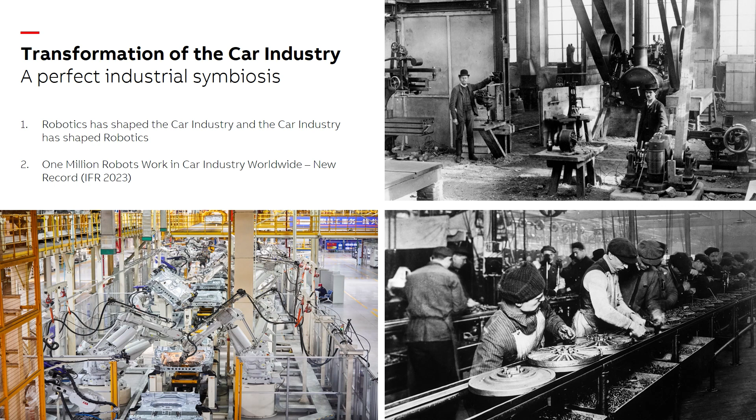Let's go a little deeper on the car, on the left side of the picture. Robotics and the car industry have been evolving together in a perfect symbiosis. For many years, robotics has been enabling mass production of cars, and also the development of this industry has pushed robotics to the level where we are today. One without the other would not have worked alone.

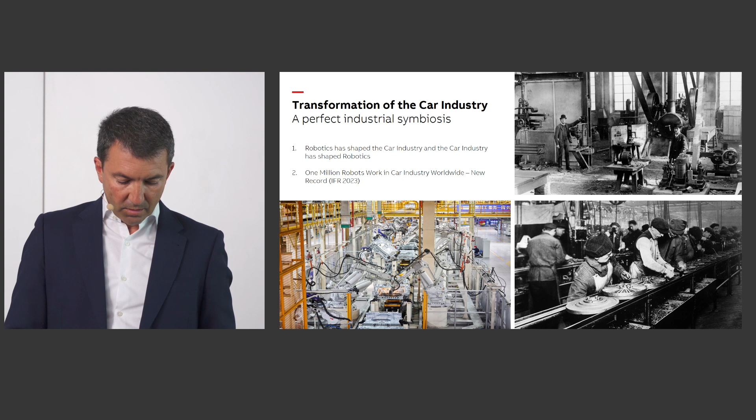But now we see even more demand. We see a shift in generation, looking more for sustainability and personalization, and this is why the technology is evolving to support higher simplicity and flexibility, making things easier for the car industry. Today we also see the mega trends: shortage of labor, shortage of skills, aging population—this is requiring even more automation in industries like automotive, for instance.

But there are also some applications in the auto industry, like welding and painting, that are already fully automated today. For example, the American Welding Society has long predicted a shortage of welders in the US of around 400,000 welders in the next 2-3 years. That's really massive. And the International Federation of Robotics has just announced that there have already been 1 million robots deployed in the auto industry.

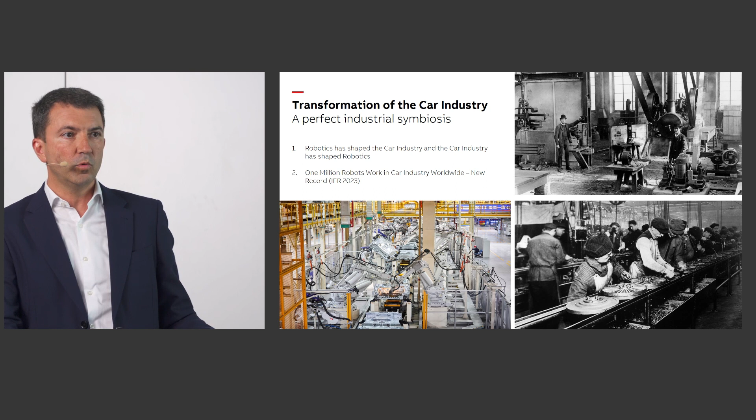That's really a milestone. The focus now is more on delivering higher flexibility, implementing more intelligent solutions to support the industry, which is facing different challenges, like moving from combustion to electrical vehicles, for instance. But if we move then to the right, to the parcel, it can be said that many of those challenges are also present in logistics. Today, we see also a shortage of labor.

We see that the consumer is the king. I want to buy this, and I want my name on it, and I don't want this in 5 days. I want it tomorrow or even today.

And this is putting a lot of pressure in the industry, in logistics. We see some leaked Amazon research warning the company that they will face problems finding workers for their warehouses in the US in 2-3 years' time. Or we see many other firms announcing that logistics will follow a similar path as automotive did 40-50 years ago.

With much higher automation, Amazon also says that a robot can pick 1,000 items per hour, which is much faster than what a worker can do, right? And we see also some companies like DHL Supply Chain that have already deployed 700 assisted item picking robots in their warehouses in US, Europe, and UK.

So that's massive. But the next obvious question is, what is the potential to automate this, right? To extend the automotive comparison, we can see that logistics is at the level automotive was 40 years ago. There is some implementation of automation, but we are still at the starting point.

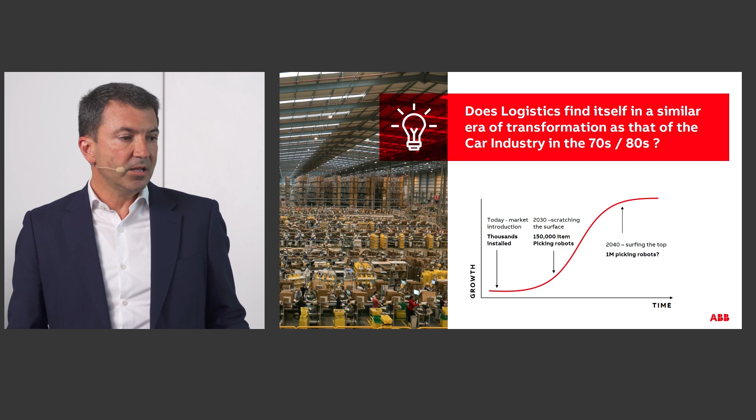According to Interact Analysis, they are estimating 150,000 item picking robots in 2030. So, when will we reach 1 million? Probably 2040? That's a good question. But this is still obviously a strong potential to grow along this curve.

That brings us to the third question. So why does this not happen still, right? Why are there 1 million robots in the car industry, but so few in logistics automation? And this is a vital question today, and is bringing on the shift on the technology, on the power of AI and machine learning that will shape a new era for logistics.

The automation in the warehouses is facing different challenges. Let's take an example of this worker who is able to identify which is the object that needs to be picked. She's able to identify how to pick it, and has the dexterity to take it from the shelf and put it in a bin, right?

Even in a structured way, she does not know what is the next item to be picked. But this is very simple for a human. It's even repetitive, sometimes even subconscious. But this brings a lot of challenge for the robot.

How to be able to pick things that we don't know, that are not informed beforehand, and how to have the dexterity and ability to handle this situation. This brings a very complex equation. And that's why AI is the solution for that.

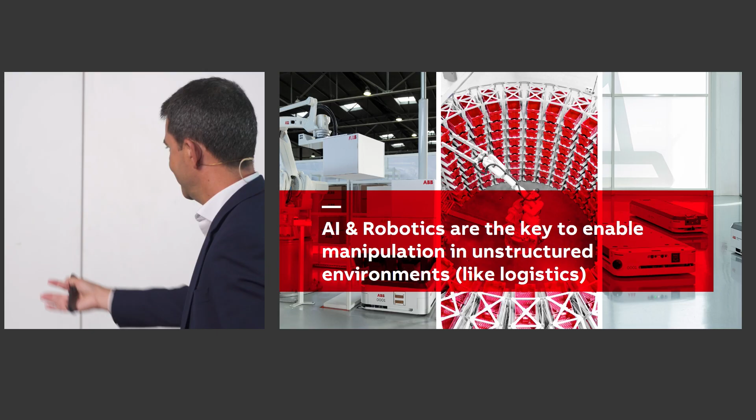I would like to introduce Jordi, who can explain to us what are the developments for the AI in our item picker. Thank you, Danny. Indeed, a very complex equation, straightforward for us humans, but really, really complex for a robot.

But it's even more than that. So going back to the analogy with the car industry, how many parts does a car have? Somewhere between 20 and 30,000 parts. However, those parts are perfectly known, and we know perfectly how those parts need to be combined in order to create a car, to assemble a car. And once this is done, basically you copy and paste, right?

In logistics, this is rather different. We have millions of items. And those items are never known in advance. And besides, they can change on a weekly basis, on a monthly basis. So that, of course, drastically changes what we have done in the past for automotive.

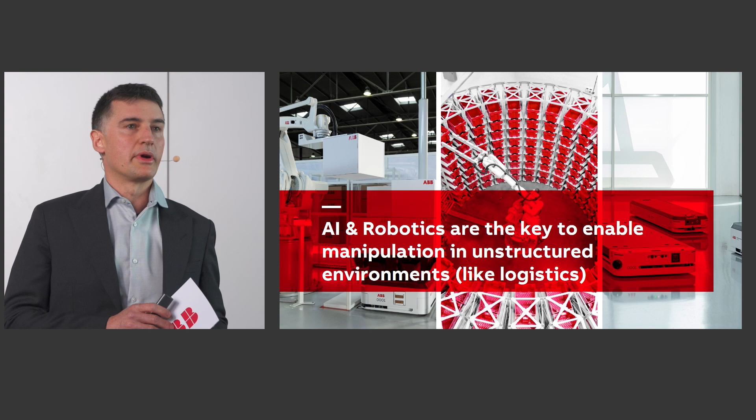And the answer is AI, of course, right? So let me give you a very simple example. This is a phone, and I think we all agree that this is a phone, right? However, a phone can have different models, right? Different number of cameras, different sizes, shapes, and so on.

But we all agree that this is a phone because we all have a model of what a telephone is, right? If we start deforming this item, at some point, some of us will start saying, hey, this is not a phone anymore. Some of us will say, okay, yeah, I think this is still a phone, right? That means we have some sort of threshold up to which we agree that this is a phone, and from which some of us will say this is not a phone anymore. AI is basically reproducing this mechanism, right? To create models of reality.

I remember very well, my daughter, who is now 6. When she was just a few weeks or months old, she would grasp an object, a toy, and spend minutes, half an hour, looking at that object. It's a beautiful scene. We've all seen that.

She was creating a model of that particular item, just as we're creating models in logistics. That's exactly what AI and logistics is about. In this example, we're training a model for an item category, which we call a cup of coffee.

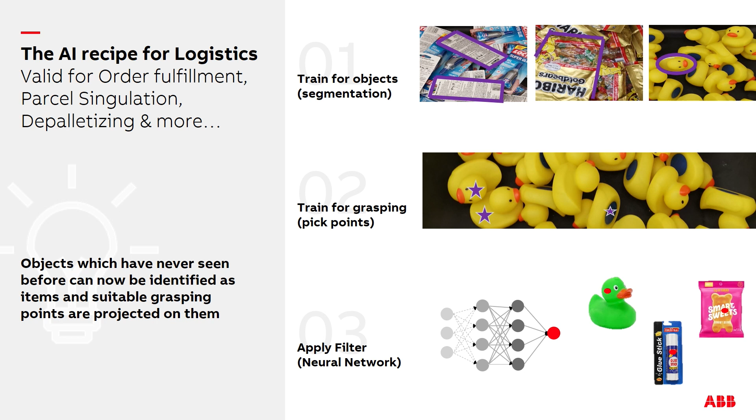The filter basically transforms an image, a picture that has been taken of the bin, the tote, or the pallet, and it outputs optimal grasping points. That's the whole idea about it.

And now, handing back to Daniel to share some really exciting news.

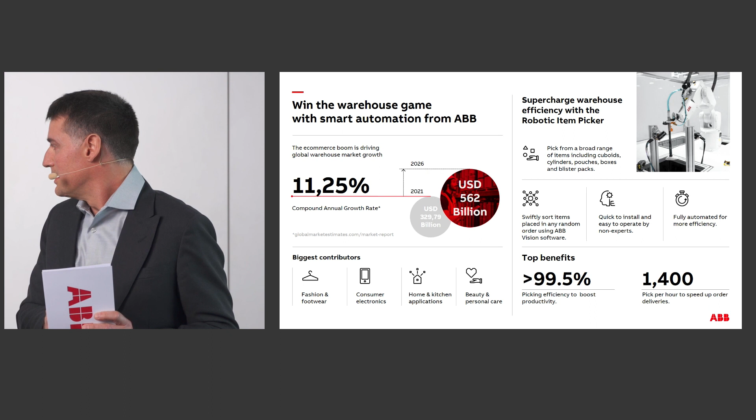Thank you, Jordi, for the explanation. Really like the example of your daughter - it really makes me think about how we are all learning continuously. So, the global market, as we discussed about the automotive industry, right?

The global warehouse market is growing at a pace of more than 11% compound annual growth rate, based on global market estimates. And as we mentioned, it's not only growing, but also increasing in complexity, with higher personalization and customization, as consumers want things now and not in 5 days' time.

So all this is changing, and we're happy to announce that we launched yesterday our AI-enabled robotics item picker, which makes fulfillment faster and much more efficient.

The robot has the ability, thanks to AI, to learn, identify the object, know where to grasp it, and the dexterity to move it and decide where to place it. This with very high speed, up to 1,400 picks per hour, with great efficiency, more than 99.5%. This is a great milestone that we achieved here today.

The technology does not require any human intervention, or even require the robot to know what is coming next or what the attributes of the objects are that it needs to pick. The AI enables this technology to identify the object, identify the grasping point, and take it from there. Let me show you the video, where I hope you can see and understand this better. This is the video for the robotics item picker.

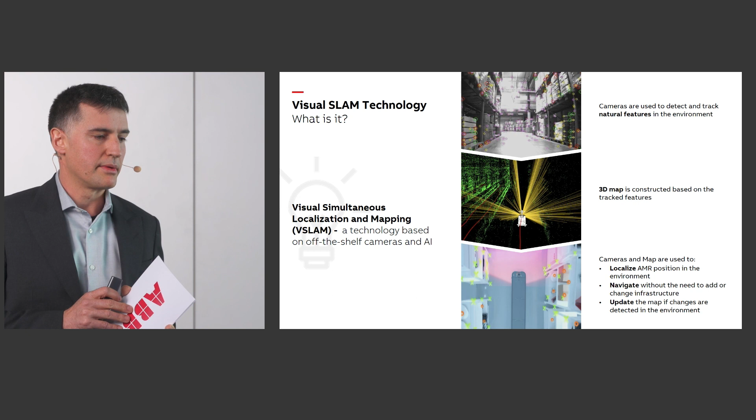So this is a very powerful technology. We've been testing it the whole last year, proving that it completely outperforms the state of the art of SLAM, which is 2D SLAM based on LiDARs, and we're ready to introduce it in our new portfolio of AMRs.

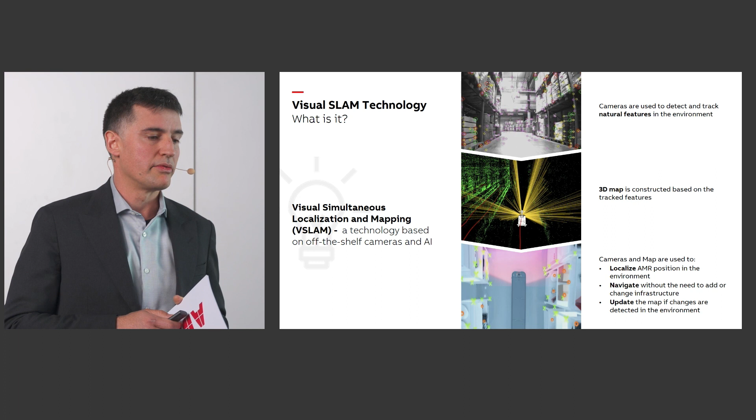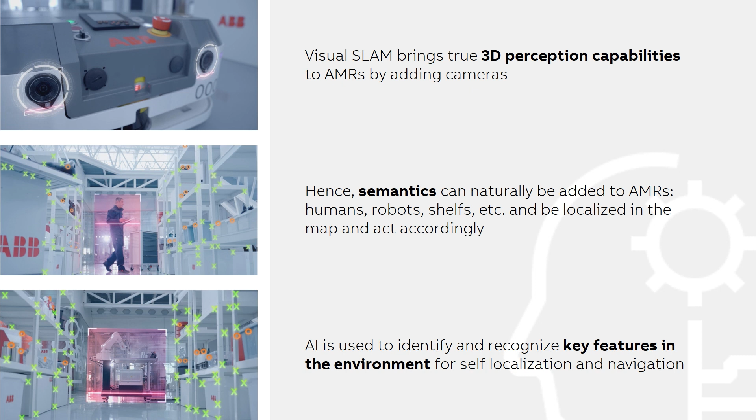Besides that, Visual SLAM offers a new dimension of possibilities because it's about 3D, and 3D is obviously more than 2D. If we take a forklift, for instance, it always requires a laser scanner on top, plus some reflectors, some markers, some artificial landmarks in order to properly do this triangulation. With Visual SLAM, we can apply this technology for forklifts, but we can also apply it identically for goods-to-persons AMRs, because we're looking on the floor, to the front, to the back, to the ceiling, because it's 3D.

Plus the fact that it's based on cameras, off-the-shelf cameras. You can really use cheap cameras if you want for Visual SLAM. So there are some real hardware cost benefits in Visual SLAM as well.

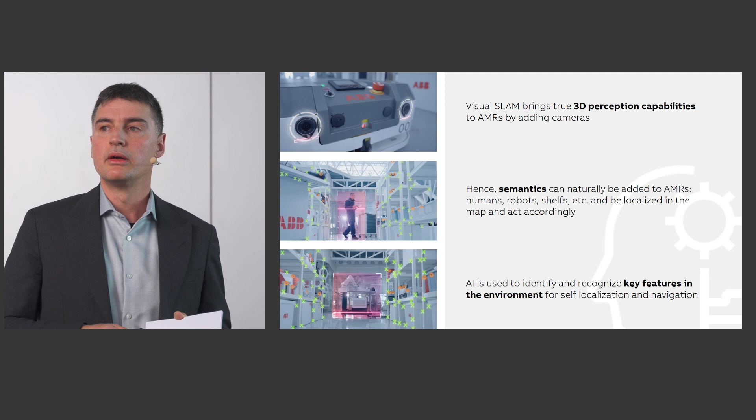But besides that, since we're bringing similar perception capabilities as those of humans onto the AMR, it means we can do many other things, like semantics. A human is not just an obstacle, a human is a human, and we can identify that it's a human because we are applying AI. We identify that it's a human and localize the human in the environment. You can apply that to pallets, to shelves, to whatever. With that, you can bring a much higher level of intelligence onto the AMR with respect to the classical 2D SLAM solution based on LiDARs.

Which are the key benefits of Visual SLAM?

First of all, it's more robust and flexible, and we're pretty certain when we say that, because we did very intensive endurance testing with our R&D team in Spain. We did all kinds of perturbation on the sensors. We applied smoke, we did occlusion on the sensors, and the system was still able to localize. As long as there is one single camera that can find one feature, it's enough.

It's easy to integrate and commission. Basically, we don't need any additional infrastructure like you would need in many other cases where you're using 2D SLAM. And it does the job. It really does the job. It's robust, it's accurate, it's actually more accurate than many 2D SLAM commercial solutions in the market. So we're convinced that this is the way to go.

We are really breaking the ice here, introducing a very new technology, very powerful, and this is the beginning of a new journey in mobile robots. Let me show you how this looks in reality.

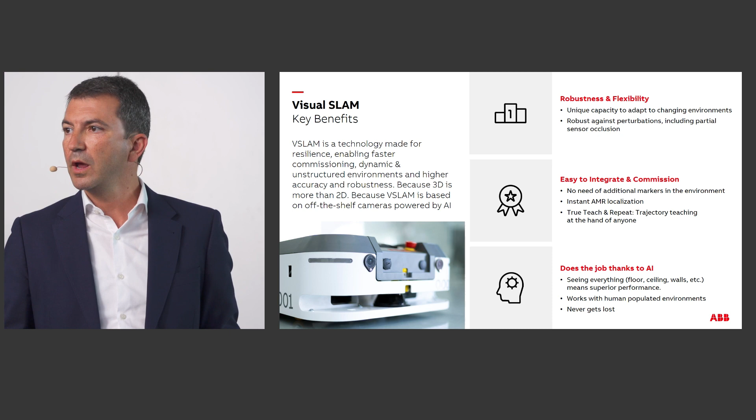Let me show you one last example: an automated flexible cross-docking solution that we put together in this animation. Roughly speaking, cross-docking means resorting of goods that are received from one carrier to another.

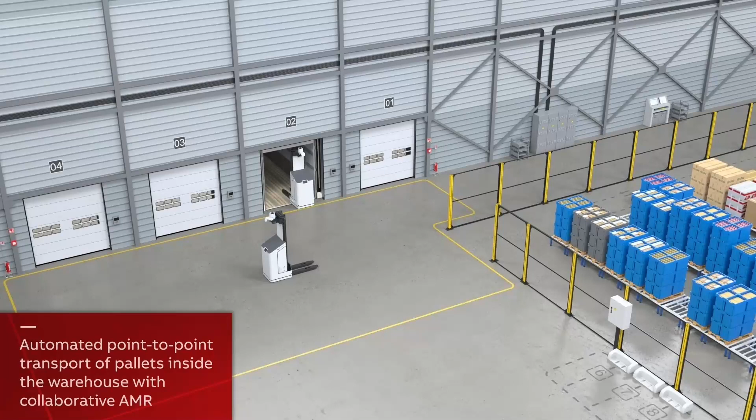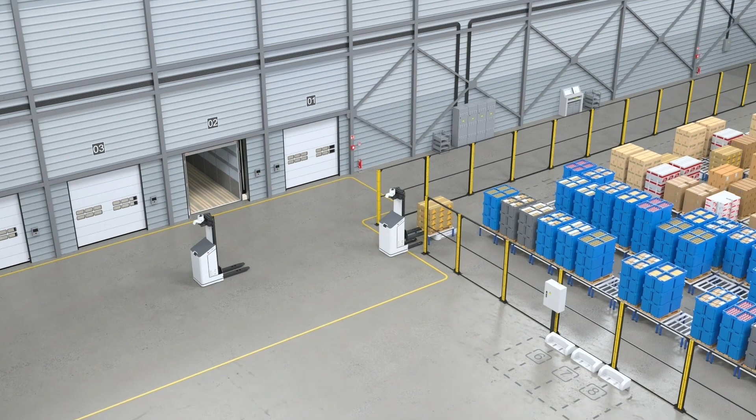In this example, we see at the inbound dock area that pallets are transported to the high-density pallet storage with our autonomous stacker AMR using VSLAM. The motion between AMRs is fully orchestrated by our fleet management system, and the flow of goods is managed by our warehouse control system. There are different options to build customer orders.

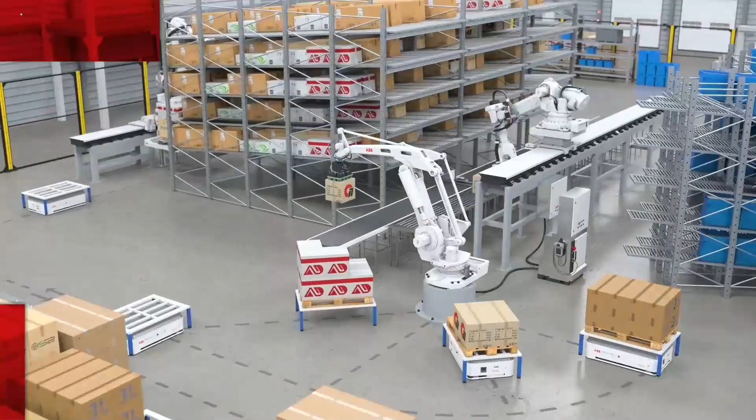The first one is with a single case flow rack based on the ABB depalletizing technology. Once the goods are placed on the buffering rack, the palletizer can fully build the customer pallet. Once the pallet is finished, the first available AMR will bring the pallet to the outbound area.

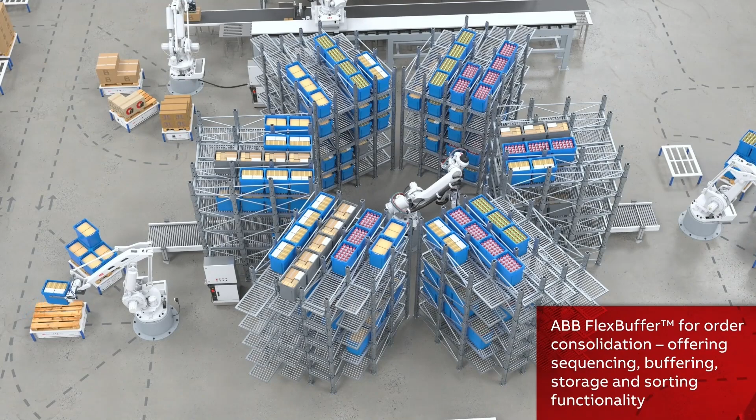The second scenario is a single case with pushback rack. After the palletizing, the ABB FlexBuffer will be used for order consolidation. It offers an efficient solution for sequencing, buffering, and sorting. And most importantly, it's fully modular, and therefore scalable.

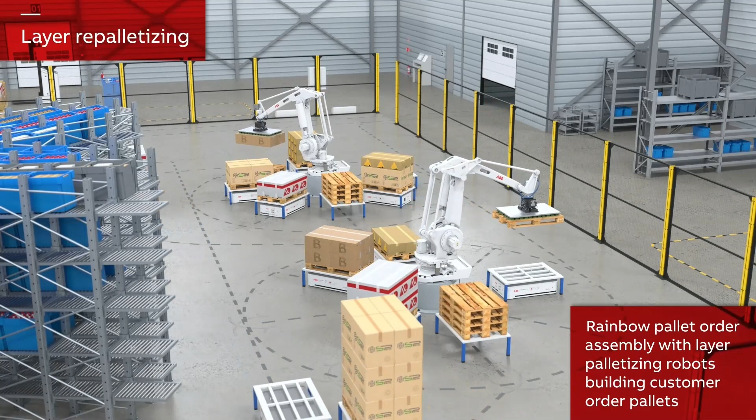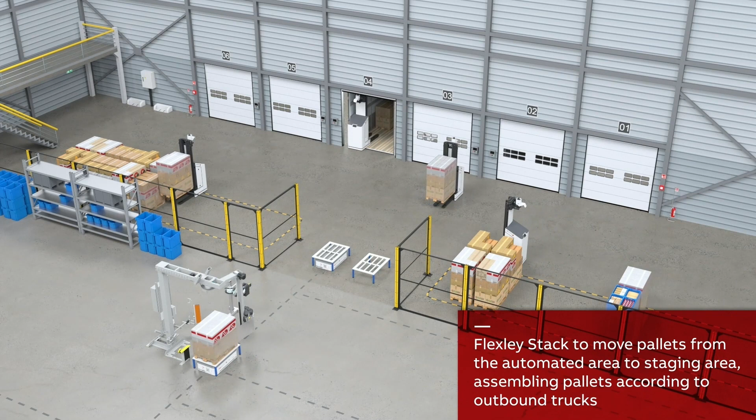The last scenario is a full-layer palletizer with these rainbow pallets, which could be probably the leanest and fastest way to build customer pallets. Finally, when the order pallets are ready for shipment, the AMRs will bring them to the outbound trucks, if necessary, through wrapping and labeling.

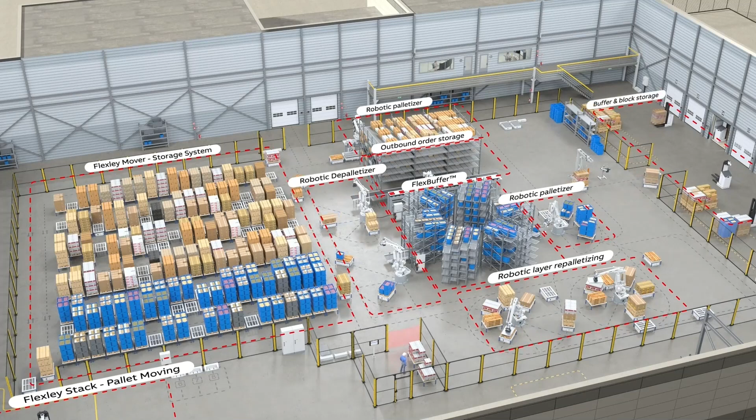So wow, this is really a big piece of automation. This is a new way of structuring and automating a warehouse, in this case, this cross-docking example, as we put it here. So today...

We have been discussing, first, how auto really evolved during the last 50 years, but why logistics was still not there. And we learned that this is because the technology was not ready for that. Today we showed a pair of cases with our AI-enabled robotic item picker and our VSLAM technology applied now in the AMRs, which will bring more opportunities to further automate, and to start higher penetration of robotics and AMRs in the logistics and warehouse environment.

These two new robots, these two new solutions, are part of the portfolio that we will continue evolving as we speak. Let's take this opportunity to make a difference here, to automate even further into the logistics and to transform logistics into new levels, to support with higher productivity, flexibility, and simplicity. So with this is what I wanted to show.